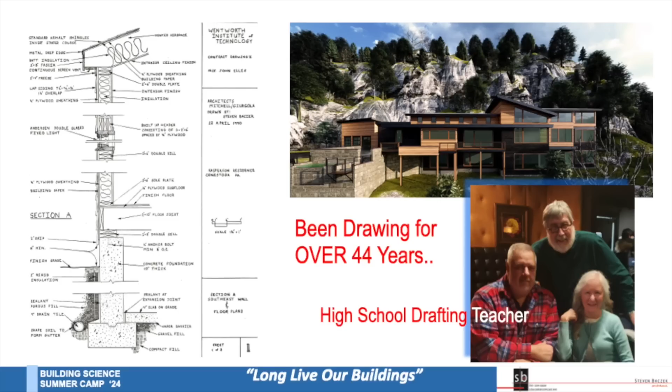And for those of you that don't know, it is actually considered a language. I had a friend that went for a master's degree and they were able to use architecture in their college application as a second language because it's a graphic language. So, I've been doing this a long time, 44 years. The drawing to the left, I actually dug it out. It's the first wall section I ever drew in college, 1980. Come a long way, because the rendering of the house on the right is the stuff I get to play with on days like this.

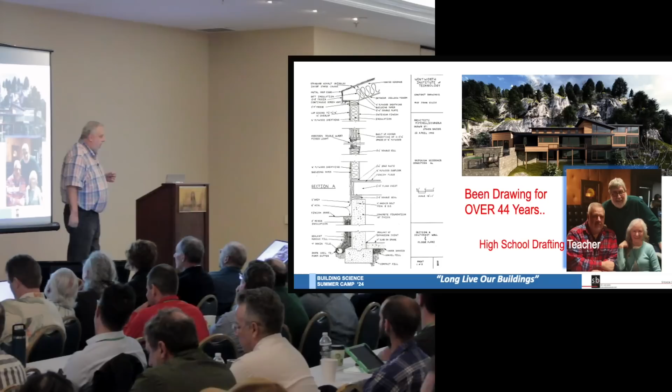Our firm, we work all over the country. We have projects in a lot of states from Colorado to South Dakota to Louisiana. Been doing it a long time, and I'm somewhat of a loyalist in the sense that the gentleman in the bottom right photo was my drafting teacher. And we usually get together a couple times a year and have dinner to just catch up and talk about where life has taken both of us.

Onward. Drawing. In developing this, I actually learned a lot about what I do when I set up a set of drawings. A lot of things we just take for granted in our work until you're asked to explain exactly what you do. So one of the things I was doing, I'm sitting there going, I wonder how many lines are in a typical drawing set. So I opened up 3 random sets,

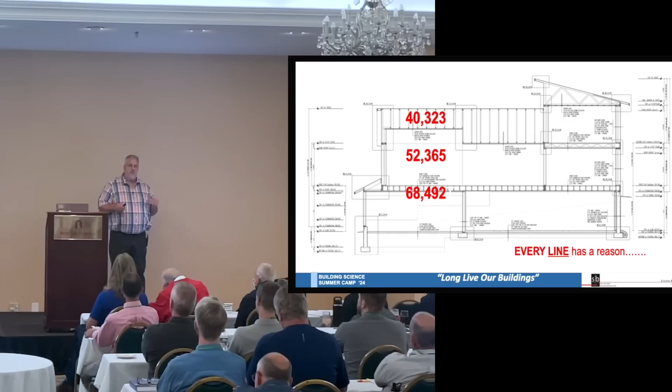listed it. What you're seeing there, between 40 and 70,000, is how many lines are in a typical drawing set. So when you're flipping through those sheets, that's what we're talking about, somewhere 50, 60,000 lines. And the reality is every one of those lines means something or should mean something, right? So we have a really important job in what we do. Although I have seen some sets where some lines probably didn't mean as much as they should have. But anyways, that's what we should strive for.

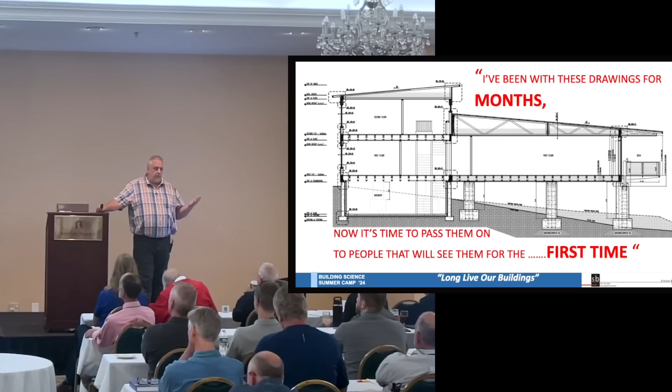Another thing I always have to remind myself of: we might design a project for over a year, do CDs, get into it, and then we pass off the drawings to the general contractor and subs and code officials, and that's the first time they ever see those drawings, right? So it's really important. For me, it's easy to say, well, I know this is that, and that's on sheet A21. But for someone to first see those drawings, there's a huge communication gap there until they get familiar with them.

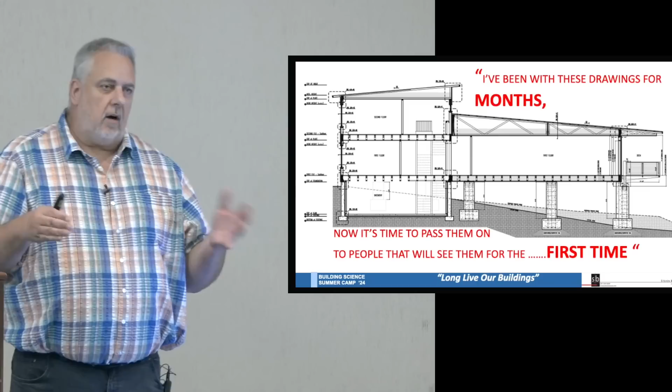And some of them only need to get familiar to throw a bid or a number at it, et cetera. But it's really important that our set of drawings is compiled in such a way that if you're giving them to somebody that's not familiar with the project, can they comprehend it? Can they get behind it? So just some thoughts. This is a detail, not my detail.

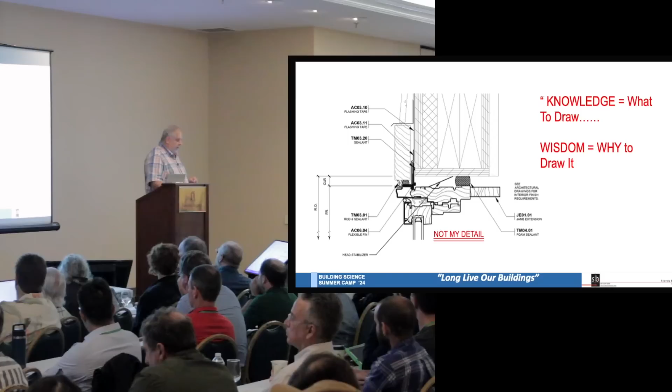I should have made it larger, but I didn't want to make a big thing out of it. I just grabbed it off the internet. It's one of those things, knowledge and wisdom, knowing what to draw versus why to draw it. There's a lot of architecture sets that I see get put together, and it's kind of like, let me see how many sheets I can fill up. Let me see how much random information I can pack in there for the builder to have to sift through to actually get the 2 or 3 tidbits of information that they need,

as well as drawing the right thing. So when you look at that detail, notice there's a sealant bead under the head casing. Behind that sealant bead is a whole series of flashing. So from a building science perspective, we put in all this flashing to maneuver water only to dam it up with that sealant bead. So it's really not a detail that's functional or that would work, right? Knowledge is saying, we should put something in here to keep the water out, while wisdom, and this does come from Joe, is asking the question, what am I sealing in?

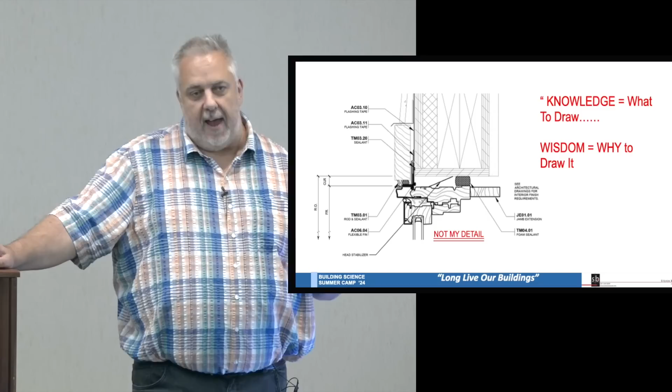Buildings don't fail because you kept the water out. That's a successful building. Buildings fail because you kept the water in, most of the time. So we have to ask the right questions when we're putting this stuff together. These I just threw in, some random alternatives.

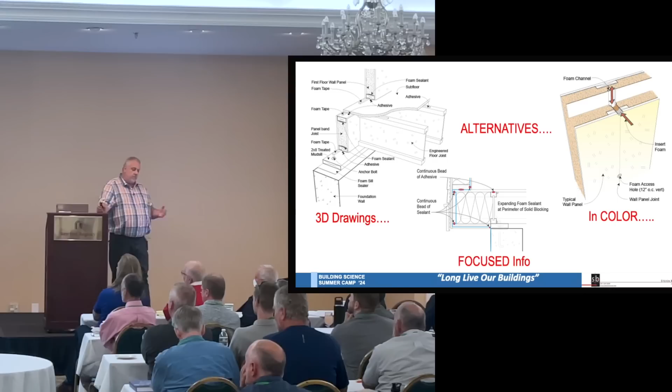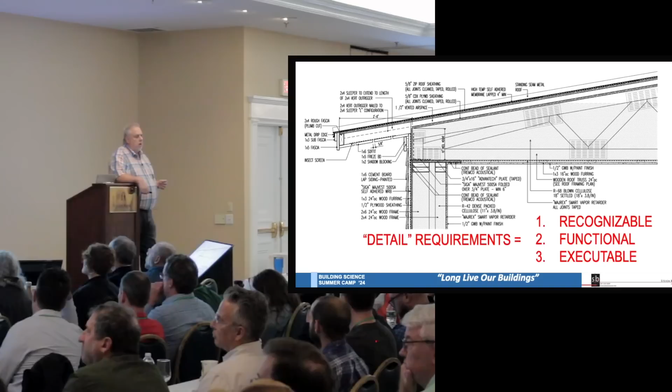As I develop details, one of the feedback I get from the builders I work with is they like that the details I draw are recognizable, right? What does that mean, recognizable? It means I'm not asking them to go buy some out of this world material and tape it with specialized tape that is extremely expensive. It's doing the right thing with the things we already do. Most of the details we develop use the same tools, the same techniques. We're just asking for a more conscious effort in certain ways that we do things.

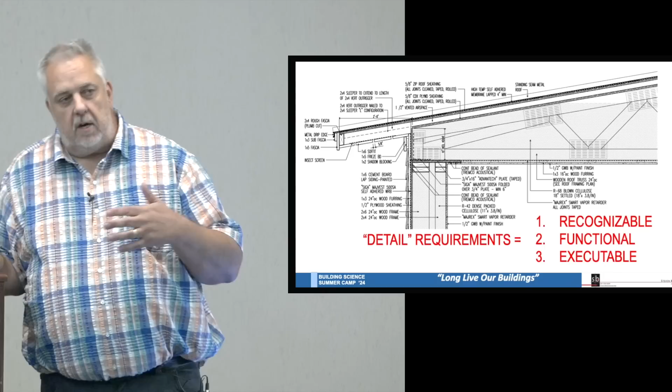So when I'm developing details on a computer, the 3 things that are important to me: recognizable, which we touched on; functional, it has to work, right? We don't want to put a bead of sealant downstream of a whole bunch of flashing. And it has to be executable, right? We all hear the stories of builders, oh yeah, those drawings just went in the circular file, because they really didn't send a message of, you can build this. One of the things I pride myself on is when the set of drawings leaves the office, there's at least one way that house can get built.

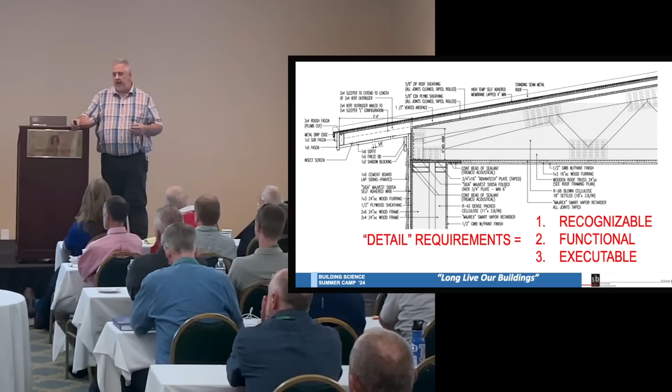Now, the framer might come back and say, hey, I like that detail, I appreciate it, but if we did this and this up on the roof, I think it would work a little better, and I'm more familiar with that. That's fine. But the drawings don't go out unless there's at least one road to success. They never go out and say, well, we can just figure that out in the field. No, that doesn't work. And it certainly doesn't work well.

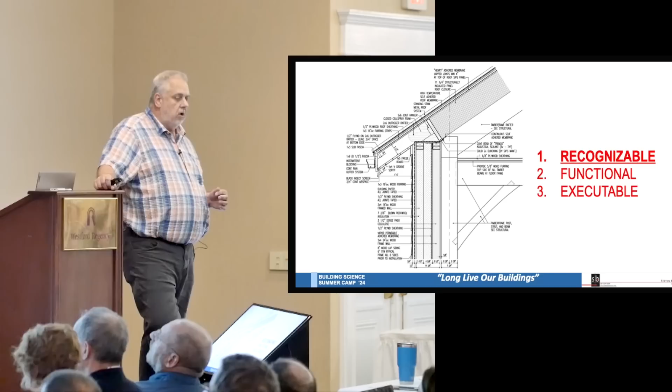So, recognizable. At first glance, it's a relatively complex detail, but it really isn't. It's a double wall assembly outside a timber frame for a passive house structure, and it's got a SIPs roof. Everything there, most builders have touched or used in a typical house. We're just putting it together in a different fashion, maybe a little more complex fashion, but it's recognizable, right?

There's nothing about that detail that says, hey, you have to go get this special tool or you're gonna need 3 guys to do that. It's stuff that they recognize that we can do. And that's part of that execution, right? If I give them something they understand, then it's something that aids in that execution.

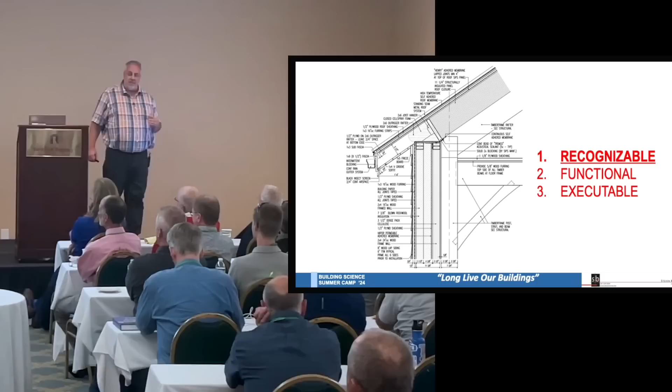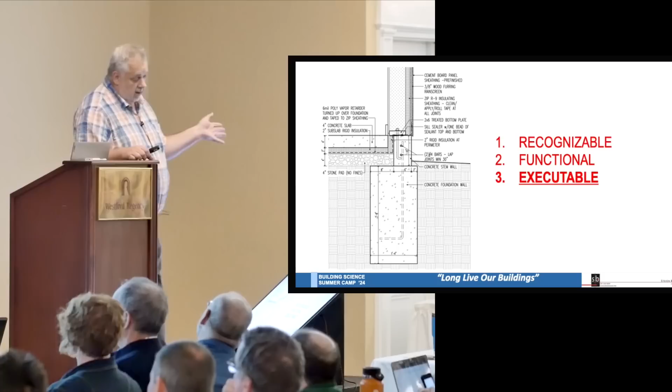Executable. I do a lot of work with Jake Bruton down in Missouri. This is a detail that we developed, right? We wanted to do a slab that is a finished slab, but we wanted to be able to insulate it. And it always becomes somewhat of a hassle trying to get the insulation in there and get the wall at the right place. So we came up with this 3-step method where we dug the trench, which is highly financially efficient there. They just use a 16-inch bucket, they trace around the foundation line, they are allowed to ground form their concrete. So we did that, but notice the little curb.

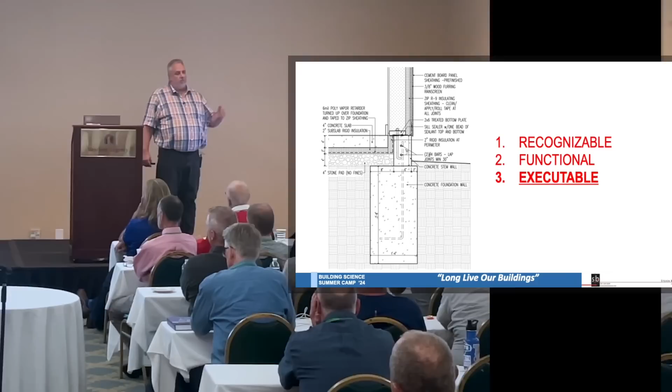We put some rebar and then we pour the curb, but the curb is set in 2 inches. Why is it set in 2 inches? So that the concrete guy has a place to put the formwork. He sets it down on that lower piece of concrete and then basically pours the curb up against it, and then we do the slab and it's business as usual. But it makes that detail far more executable with that simple fact of moving that curb in 2 inches and making people's life easy.

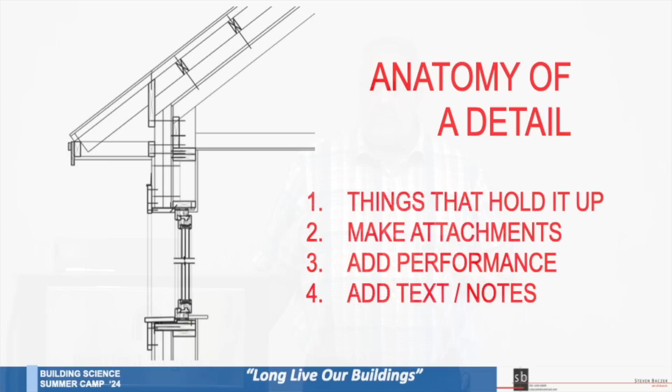Let's talk about details in general and how I develop them. Well, first and foremost, we have to think about the things that hold it up, right? Obviously, we don't want our buildings falling down. So that's pretty easy. Develop the detail, put in the structure, how things are going to meet, and then how to make attachments. I chose this detail. I'm actually in the process of developing this one, so this is kind of like almost live streaming this detail.

But we have 4 inches of rigid insulation on the outside of the wall, 6 inches on the roof. And how do we attach that? And better yet, attaching it is pretty easy. How do we attach all the trim around the windows and all of the associated pieces that come together with that? And do I have a place to nail that jamb trim or that head casing? All of these things make it executable, right? We have to think through these things.

So before I even get into putting in tape and flashing and all of that, I want to make sure that all of my attachment requirements have been serviced here. And then I'll add the performance, basically putting in that insulation and the hatch and all of that. And then we'll simply add the text. You know, the other thing I find pretty common in construction drawings is you always get the real simple wall section or the real simple building section. Nobody draws the hard one, but the hard one is the one we need.

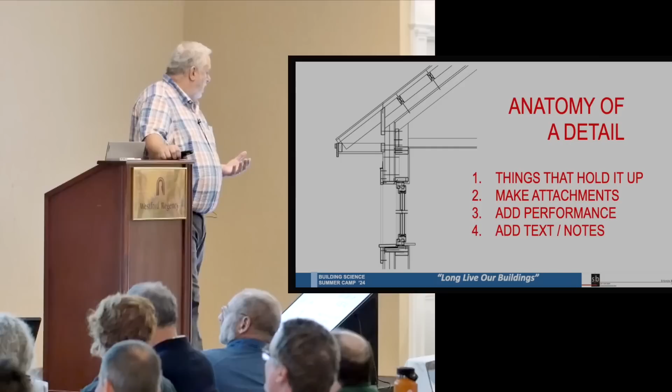The easy one isn't the one we need. The builder probably knows how to do that in his sleep. But when this roof is coming in and has to miss this window, and then the insulation and the air barrier is in conflict there, somebody has to sort that out and figure it out. And that's what we have to do. And we have to pick those hard details, not necessarily those easy ones.

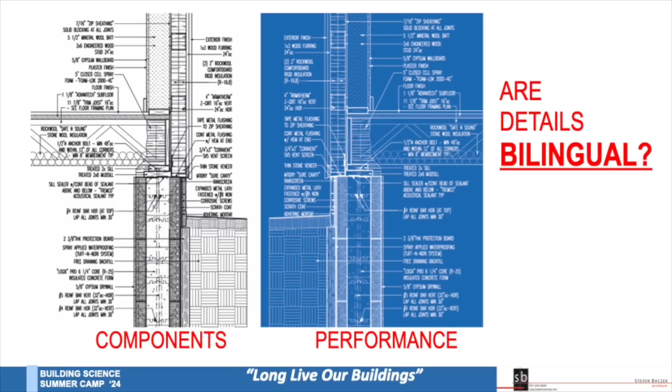So, details themselves. You know, when I was developing this, I was thinking about it, and it's like, in all actuality, details are bilingual, right? We always think, hey, okay, there's a 2x6, that's an LVL, et cetera, but the people in this room tend to think of it a little differently. Like, where does the water go? How does this detail handle air management?

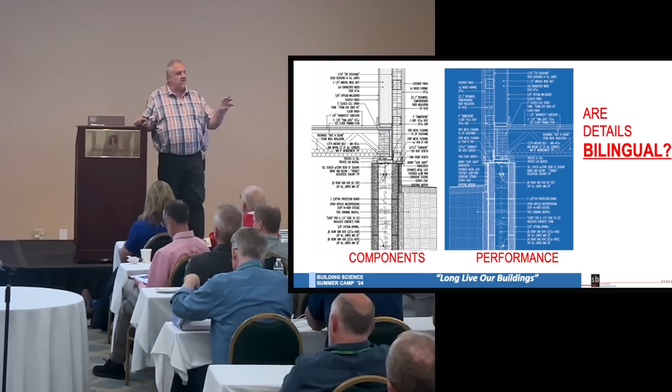How does this detail dry out? How is this detail insulated? What's the thermal management that's happening in here? So details aren't only about how do we put it together, it's also about what is that system doing with the other assemblies to make it a successful house.

A lot of times I do what we call our twins. So on a computer, it's real easy. I can do a detail, I can add all kinds of information, I can put it on separate layers, and I can freeze layers when we go to plot it. So you can see layers 1 through 7 and 12 and 13. And then on a different detail, we can show layers 7, 8, and 9. And what that does is it allows me to sift and sort out information for clarity.

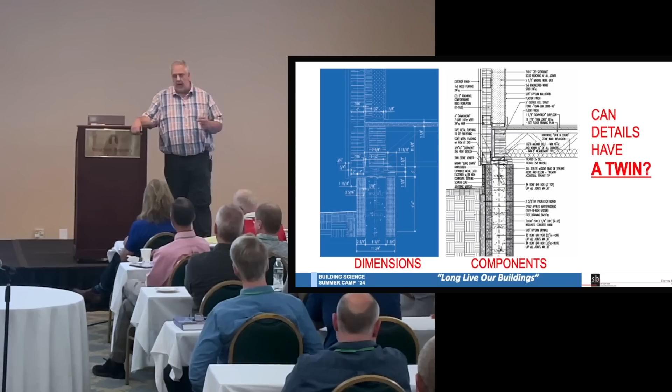Working all over the country, I obviously don't get to work with the same builders all the time. And in some places in America, with the subcontractors, there's communication issues of trying to talk to them, or maybe just talking to one person on that crew who disperses all the information. But trying to find a way in which the drawings can kind of service everybody and sort out the information that that person needs at that particular time in the project, right?

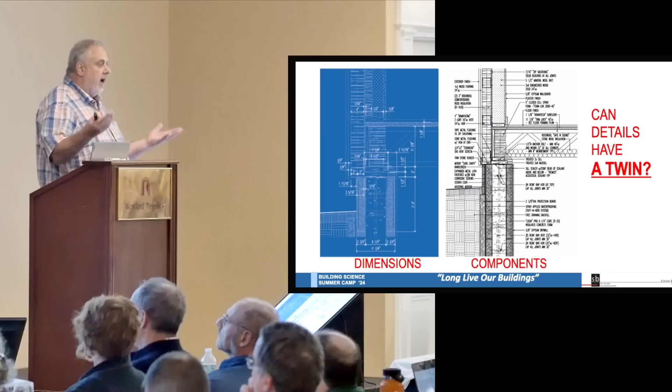So this one here, we get all the notes in one detail, we get all the dimensions on the other side. So if the builder said, oh, I wonder what this is or what's this supposed to be here, he's not guessing, he doesn't have to call me, he's got a full drawing there with every applicable dimension to that detail. And so he can check himself and find out, okay, are we in alignment or not? And sometimes I do the twins, again, for the purpose of, we have different people doing different things.

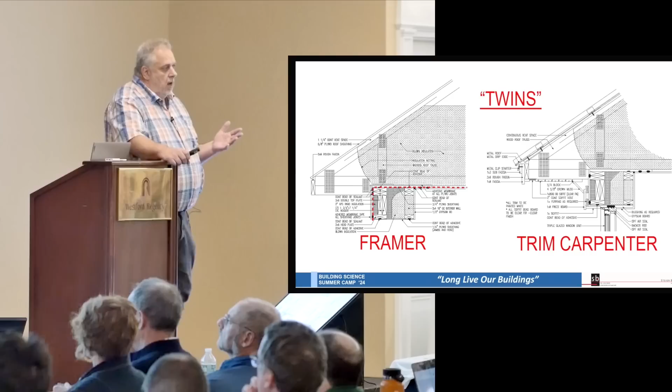Probably late 80s, I actually worked as a carpenter. Well, the guy that I worked for, they did the foundation. He did the framing, put the windows in, did the siding, did the roofing, and then put all the insulation in. Then the drywaller came in, and then he trimmed it out, hung the doors, put the cabinets in, put the hardwood floor down, right? Everything that I just said was one contractor.

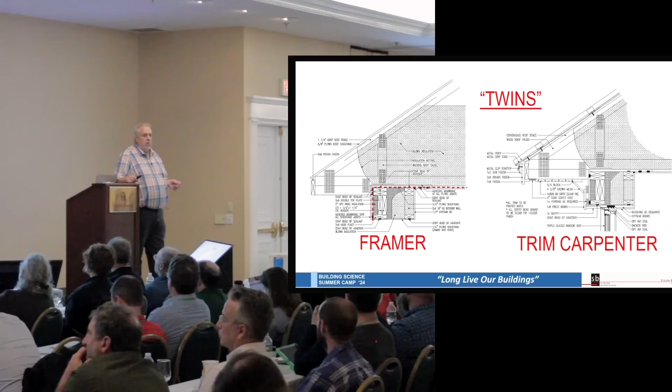If you did that today, we probably have 3 or 4 contractors that deal with the window, right? There's the guy that puts it in, then the guy that comes around and seals it and tapes it, and then the trim guy that comes around and puts the trim on. Totally different unions. Right? So how do we satisfy that? And how do we make sure that we're making their job as easy as possible, right?

Without trying to make my job harder. I mean, I'm not sitting here saying, hey, let's double the price on doing these drawings. That's not my point. But trying to get this out so that we have as little conflict in that communication stream as we can.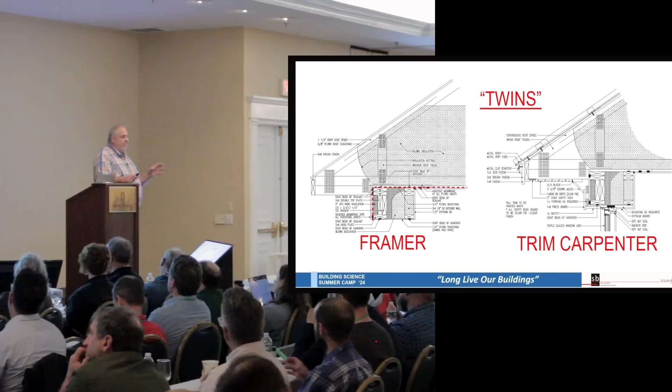Right? So again, twins, the detail on the left, that's for the framer. It's everything the framer needs to know. It's all of the framing components. It's where all the beads of sealant and everything that he has to do is on that detail. The detail on the right, while it still shows all of the beads of sealant, it only has the notes for the trim carpenter. It's how do I put the soffit in, the fascia, all of that. So we're able to separate that information so basically each of the subs get their own version of that detail rather than having to sort it out.

So, like being here talking to you today, fear is a really good motivator. Got this project on the coast north of Boston, drove away going, yeah, brand new, beautiful, big house right on the rocky cliff overlooking the ocean. 10 minutes later, holy crap. Big house, very rich client, house on the ocean, on a rocky cliff.

Maybe it's, you know, careful what you wish for, right? Those cliches, they do mean something. But anyways, so we're doing this. Rocky cliff, we do a bunch of blasting, bunch of grinding.

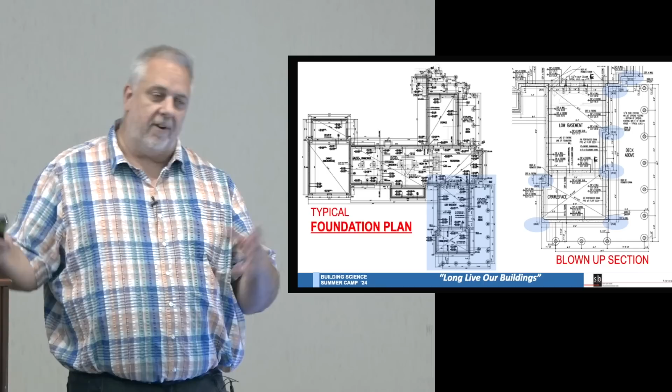That was where the old house was. So there was no maneuvering for "that's kind of close." No, it had to be. And so that really started to instill some fear. So the blow up on the right, you can see, that's that colored section in the lower right of the plan. The places where I highlighted, notice I mark up steps in wall, steps in footings. It even has the finished grade at every corner of the building in parentheses.

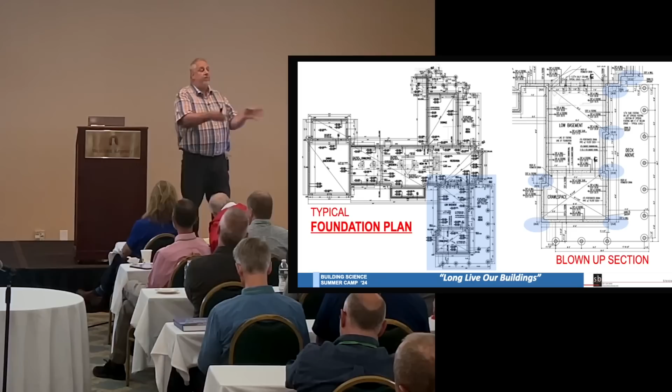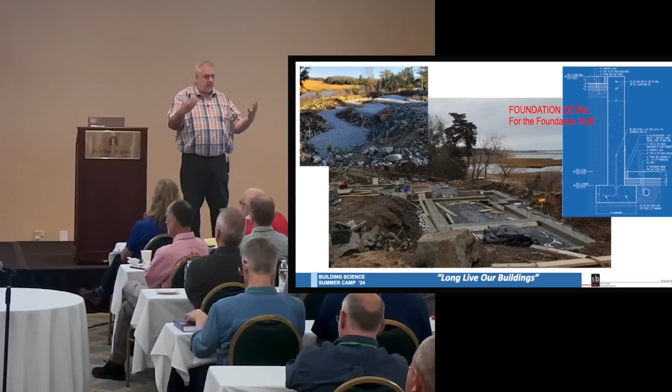As a side note, I always separate a lot of drawings. I'll pull the foundation wall out and put it on the foundation print. I'll pull it out of the wall sections. That way there, two things are happening. And I learned this from conversations with builders. They don't want to have to send 5 or 6 drawings to their concrete guy. They want to send 2.

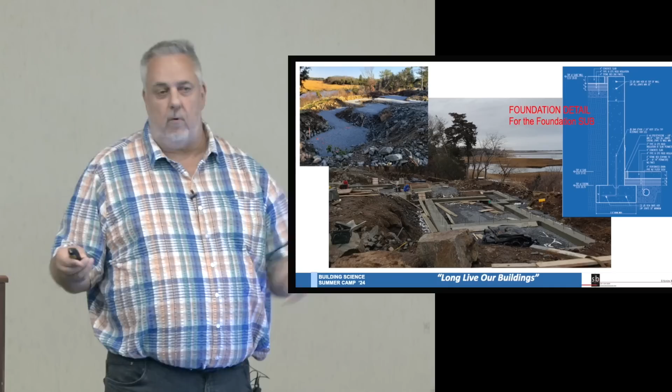So if I put a section of the foundation wall on the foundation drawings, they can just send that one drawing off, and now the foundation guy has everything he needs to know on one sheet, right? And you're not taking a bunch of sheets, and he's not sifting through wall sections, siding and all of this other stuff that really doesn't pertain to him. He's long gone before the lumber gets dropped, right? So what did I do?

I built the 3D model of the whole foundation. It added a few hours, but this isn't a cheap house. And to fix that problem is not a cheap fix, right? So a couple hours, maybe we're talking 6, 7 hours to get it perfectly right, was certainly worth it. Notice in the model, you can barely see it, but there's some green fading. So I was able to delineate between above grade and below grade.

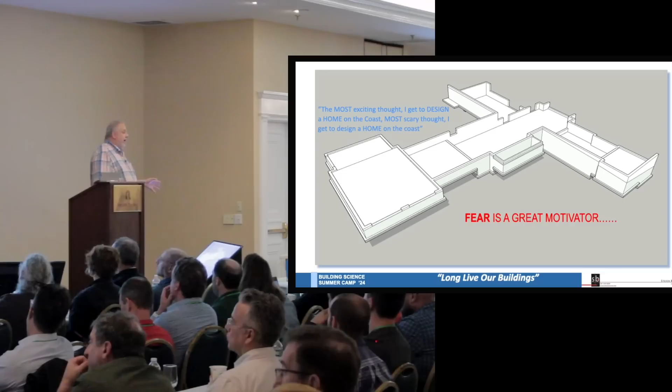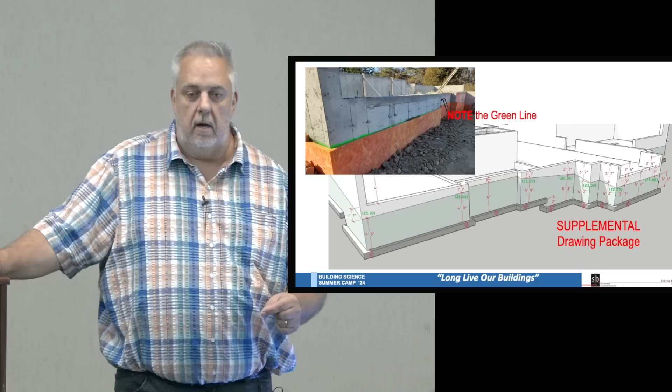So in doing that, I solved the problem for, okay, I understand what I'm doing now. I see it here in 3D. How do I get this to the builder? So I take that drawing, I add a bunch of dimensions, and here you can clearly see all of the numbers in green tied directly to the site plan. So now the builder knows exactly where the insulation goes.

So what does Brian do, who's the project manager here? Well, he takes my numbers, goes around the foundation, snaps a bunch of lines, sprays that green line in the photo, and then simply tells the gentleman coming to do the Tuff-N-Dri, just take it up to the green line.

So I'm out of hot water, the general contractor's out of hot water, the Tuff-N-Dri guy is out of hot water, and the excavator is out of hot water, because the excavator now just buries the Tuff-N-Dri. So that one drawing coordinated a whole bunch of efforts, but not only coordinated, but lowered our risk to almost 0 for 6 hours worth of work.

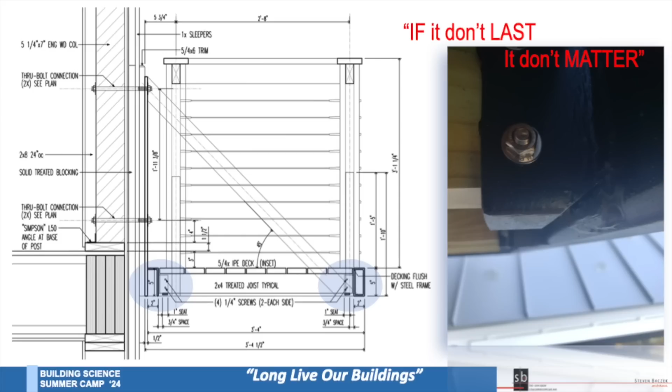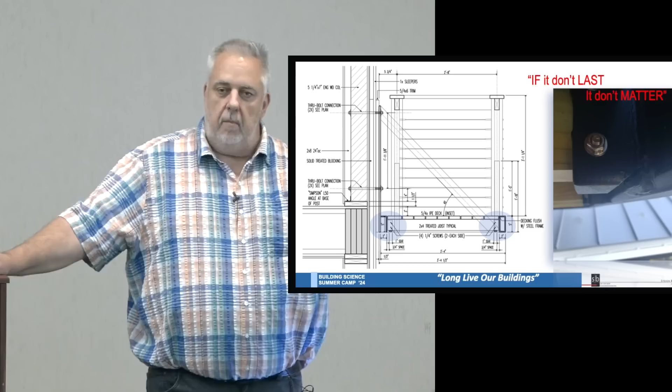One of the other things that we do, especially with local projects, the projects away from here, they become a little bit of a challenge. But locally, I have a structural engineer. He doesn't do any of the drawings. We draw every structural drawing, details, sections, framing plans. I send them to him, he marks them up, I put the marks in, I send them back, he signs off on it, I stamp them, we build the house.

Now, you might sit there and say, well, Steve, that's a lot of work. It is, it's a fair amount of work, but he doesn't charge much. He'll do a $4 million house for a $2,500 structural fee, right, to review the drawings, because I'm doing all the drawings.

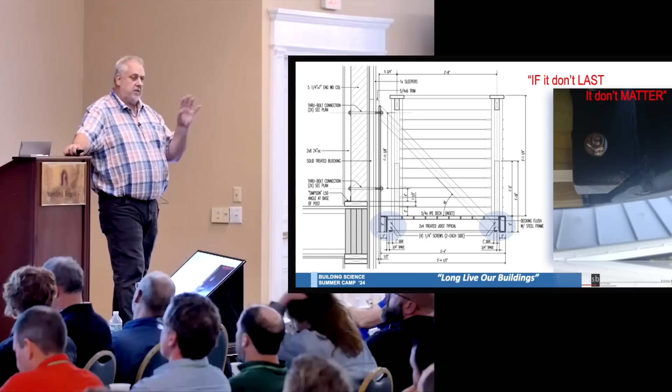But the beauty is, by me doing the structural drawings, I don't know many structural engineers that go beyond strength or holding up the building in the detail, right? Not many structural engineers, and it's not a dig on them, it's just they're not trained to see that way, right? So by me doing all of the details, then I can sit there and say, where does the water go? What happens to the water?

So this is a very small detail on the house, but we did these joist hangers that were welded to that 3x5 on this deck. And then I called out for the backside of the joist hanger to be notched so water could drain out. So that floor joist doesn't sit in a puddle of water on that joist. We know where the water goes.

And the floor joist sits on a little 1/4-inch piece of neoprene. So it never sits in water. A joist will never rot out. It has the ability to dry. Water has the ability to drain. We get a detail that holds the deck up, but it's highly durable now because I take the responsibility to coordinate the structural engineer's efforts with our building science efforts in that detail.

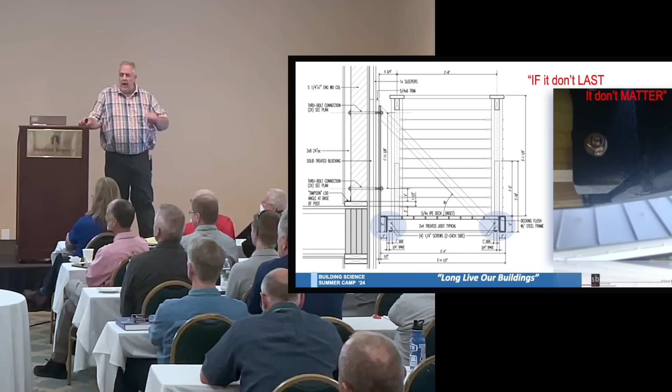Same here. If you follow me on social media, I'm sure you've seen this project. I put no less than 1,000 photos or videos up of it. You know, we were developing this project, Jake and I, he was the builder on this, and I said, it'd be really cool to do a 10-foot cantilever deck out here. It's probably a little over 9 foot, but send it to the structural engineer. He goes, yeah, we can do that pretty much no problem. I was like, yes, that's awesome.

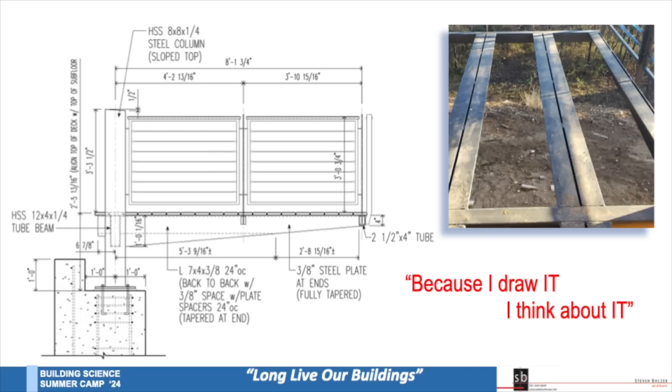But the structural engineer comes back and he has these two 7-inch angles and he's got them welded together. And there's a little notch at the top. And I said, okay, from a durability perspective, where does the water go? Water's gonna sit on the top of those angles, it's gonna rust out eventually, and this deck is gonna fail. So I went back to the structural engineer and said, can we split the angles?

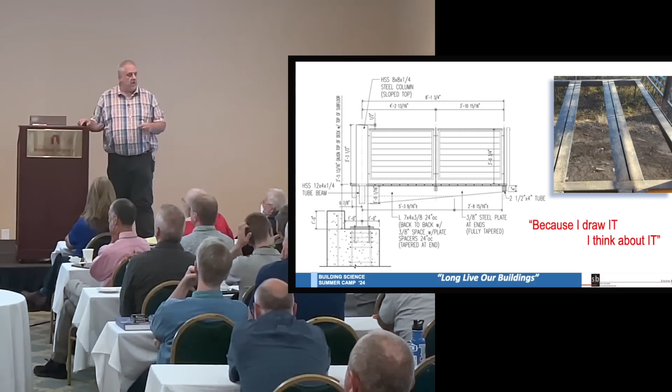And you'll see it in between the angles. We welded a little 3/8-inch steel plate like every 2 feet along those angles. So now water can freely drop down in between those angles. Water management issue gone. We have a draining system that can get rid of the water. We've answered that question, where does the water go?

And then these are just some other details for the steel guy, giving you a picture of it. Even the steel post on there, we put a little slope. It's an 8x8, and I called for a little 5% slope on the top, so that we're always stitching together building science with all of our work and asking the very simple questions.

I always find it interesting, you know, I'll sit in on a Thursday, or I won't say Thursday, I didn't mean a BS and beer reference, but I'll sit in on these online seminars and man, architects love to complicate shit. They'll put tons of insulation in and say, where does the water go? Oh, it's gonna get stuck in there. Oh, no problem. We'll just drill through the insulation and provide a drainage path.

$4 million house, and your answer is, we'll drill a hole up through the insulation where we're over insulating the window frame? Doesn't sound like a detail that would go appropriately with that house. But man, we love to complicate things. Building science is pretty simple.

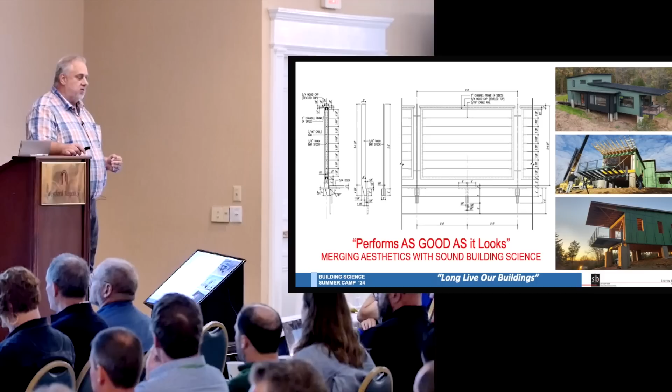I use Joe's remark, and I know I reference him a lot, but pretty much Joe is a lot of the reason I'm standing here in front of you, right? It's not rocket science, it's building science. I tell people that all the time. You ask 10 simple questions and you lower your risk by half if you can answer them successfully in doing a set of drawings. It is that simple. It doesn't have to be complicated.

Roof framing plan. A lot of times we draw things not because we are actually designing them. I'm drawing them to show somebody the intent, right? We do a roof framing plan. The roof framing plan goes to the general contractor who sends it to his truss manufacturer. If I don't do the truss elevations, guess what? I'm almost guaranteed to get back a truss package that is nothing like what I intended, right?

The heel height is wrong. The slope of the roof might be wrong. If it's a hybrid truss that has a small portion of scissor truss embedded into a gable truss, the dimensions are going to be wrong.

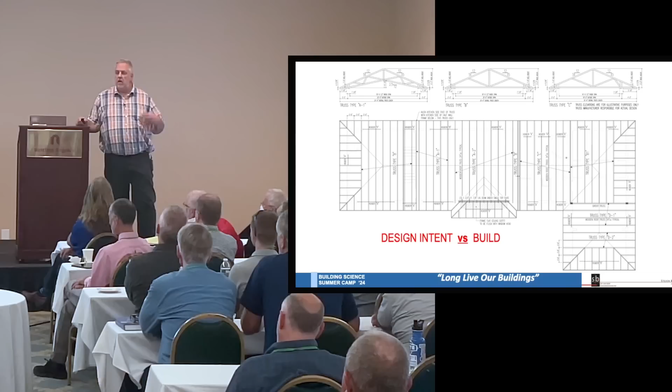So I learned early on, if I simply draw a couple truss profiles and then I outline where they're located on the roof plan, now it's a drafting exercise for the truss manufacturer. They don't have to think. All the dimensions are answered there. They can plug it in, they can send the drawings back, and we save a lot of time, right?

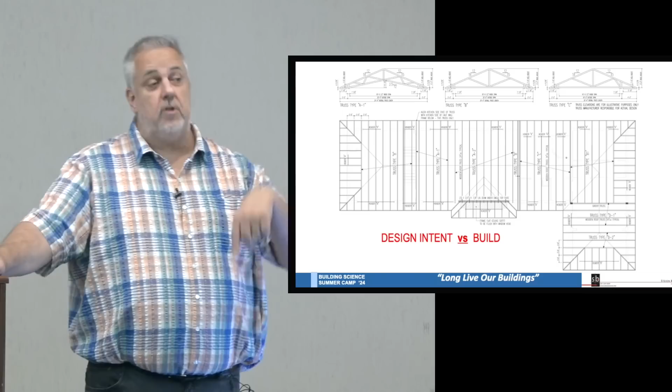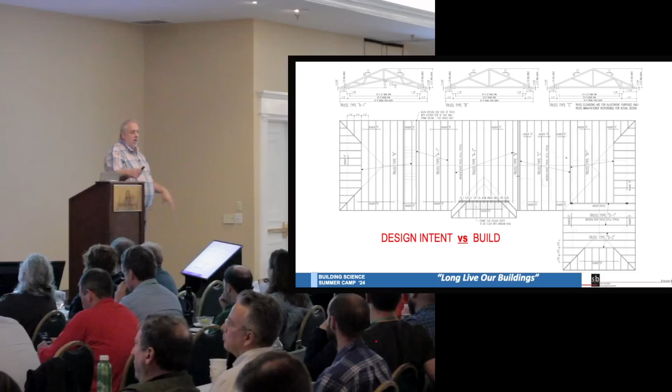It costs me a little bit of time to do it, but we save that time in not having to go back and forth 3 or 4 times and then have the truss still come out wrong. Now, some of you might laugh, but it happens, right? 3 or 4 iterations, they build them and they come out and we're cutting them up and modifying them on the site.

Some focused information that goes on drawings. We do a lot of work on the water, near the coast. In this particular project here, I think this was Zip R6 or maybe it was R9. In this particular case, this was Zip R9. The structural engineer had a long list of, hey, we need to figure out a way where we can show them where the shear walls are, where connectors are, and then here's all the hardware that goes in the wall section. So we developed drawings that showed those answers.

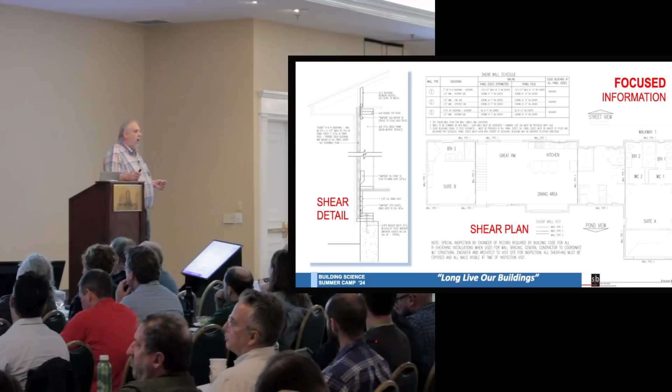There's no other dimensions on those floor plans, nothing. It's just, this is where the shear walls are. You have a shear wall schedule there. We know how they're built, what nail goes in, what the spacing is on that nail. In the wall section on the left, we have the details. We have all of the Simpson hangers called out, where their location is, what their spacing is on that wall. Again, making everybody's job that much easier to be successful with.

Windows. This is a big talk because windows are a tough one. We do a lot of Euro flangeless windows. Occasionally we do some flanged windows and we're working up some standard details for that, but I use the flangeless for this example. In my time, I've probably done about 9 generations of window details because I like to go out, I always install the first or second window with the builder.

And I tell them, I don't do it because I'm coming out here and this is some kind of lecture like, hey, Jimmy and Johnny, pay attention because I'm going to show you how to do a window. No, we go through how I typically install it, ask them, do you have any conversation here, any discussion you want to talk about? Do you want to change something? And occasionally they say, hey, maybe if you did this or can I do that? And then it becomes the next generation of the detail.

But one of the problems with these details is you have the sill, jamb, and head, very traditional details, pretty highly detailed, all the dimensions are there, but again, it's a whole bunch of information that different parties only need small tidbits of, right? I could calculate the rough opening for the windows on here, but it'd be a hell of a challenge.

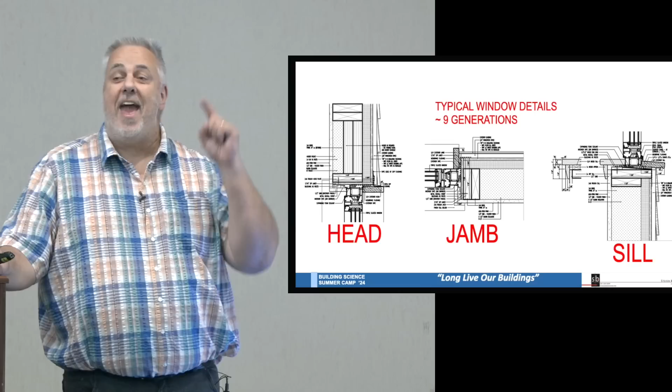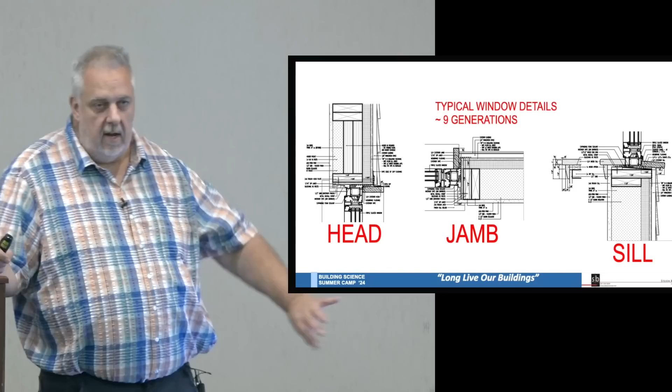And yes, we've had a house where we went out there and the builder framed every window opening 1.5 inches short in width. In height, it would have been easy, but think about it in width. Every header has to come out and get recut. You talk about a pain in the ass. And especially when it's 1.5 inches, does that mean it's off center? Do we have to recenter it? So, needless to say, the days of 3 details for windows, long gone.

Now, we get a whole series of details. We're just going to run through how that one sill detail became 9 details. All right? So detail 1, that's everything that has to happen to the rough opening. We put a back dam in, we put a slope sill in, we put a piece of flashing. That's where our window is going to go with the applicable dimensions. That's it. That's everything that the rough framer needs to know to install that window.

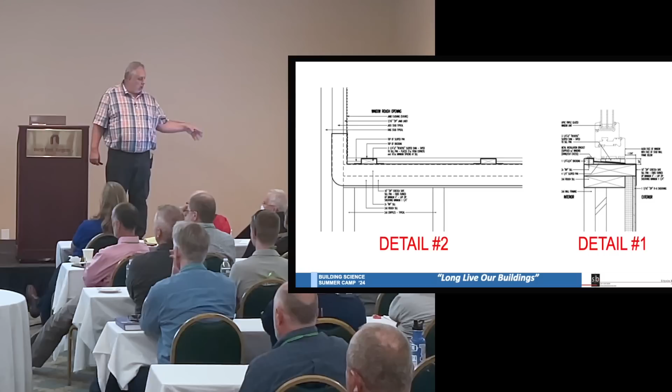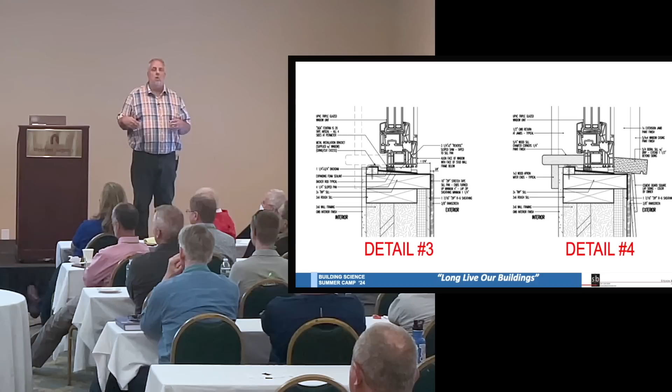And by the way, I did a front elevation to show you where some shims will go and where the flashing goes on that detail. So that's 2. Detail 3, we install the window. We do our air sealing detail there, end of detail. Detail 4, trim carpenters come in, siding contractors come in, siding gets attached, trim, all of that stuff gets applied to the window, and then we move on. 4 details. But it doesn't stop there.

So now I don't get any more calls about, hey Steve, the rough opening, I just want to run those numbers by you. No, go to sheet 21, it's there. Unit dimension plus 2 inches wide, unit dimension plus 3.5 vertically. It's all there, no questions asked.

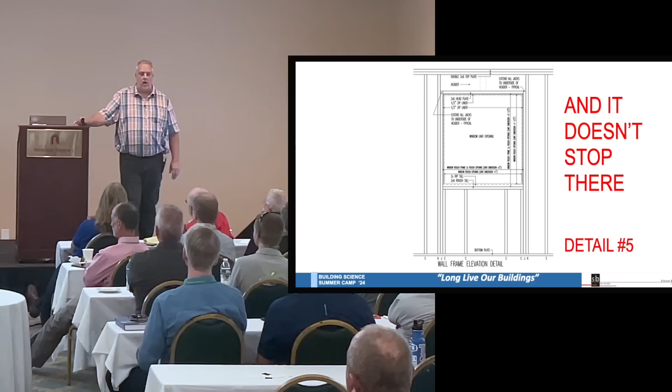It still doesn't stop there. I did it in section and plan. So we have the dimensions everywhere. Everything's labeled appropriately. The exterior sheathing is there. We'll have them for different details. But again, providing that level of clarity so that we can do something.

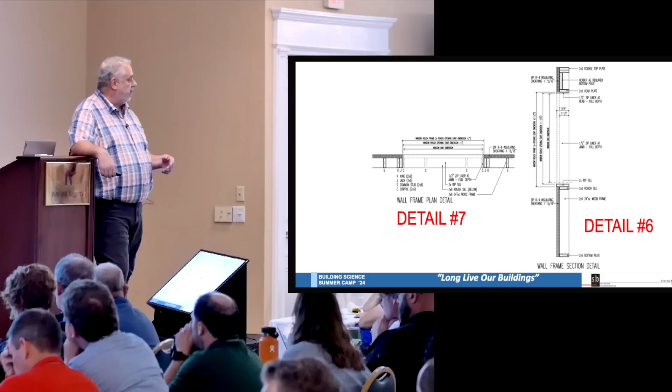We saw, I forget, is it Brian from RDH yesterday, right? Windows. It's one of the most susceptible areas in a building. But yet, how many drawing sets have we seen that actually have executable window details on them? Right? I mean, if I was an insurance company and an architecture firm came to me, I would be like, yeah, we'll give you insurance, but you've got to show me you can draw a window detail before we give you that insurance policy, right?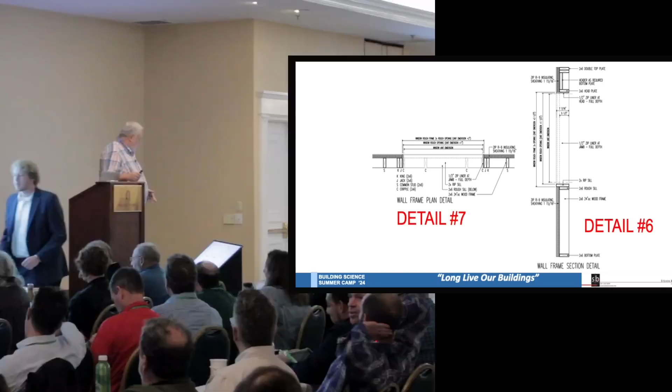But, I mean, we in this room laugh and joke because it is kind of funny. But the reality is, Peter Yost and I jump fences and go and look at these houses when we're traveling. It's horrendous. And we're not talking about some little 1,200-foot cottage. We're talking about a $6 million building somewhere in Texas. So, I'm serious. It's like, how many people really?

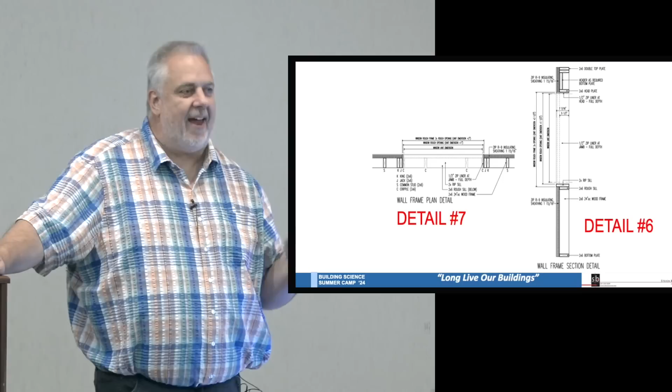And I'll tell a little short story here. I had a couple guys, consultants, you'll appreciate this, they were the best Monday morning quarterbacks that I've ever met. So I got them one day. I said, you know what? We're going to install windows out at the Johnsons. Why don't you come on out and we can talk? So we got out there. Framer's getting things ready. I said, no, let's let these two guys install the window.

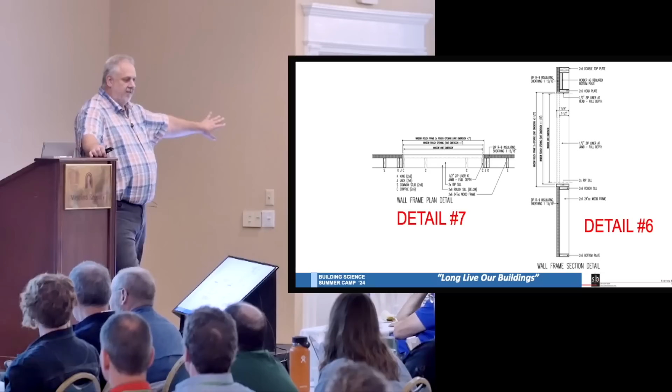And they looked at me and said, you want us to install the windows? I said, yeah, all the tools are right there, drawing details right there. You're always telling me about how I should do this and draw this. What a great opportunity for me to learn from such experts. We stood there for about an hour and a half before we said, guys, forget it, just go. And we installed the window. But it's a lot easier to talk about this stuff and create an academic exercise about this stuff than it is to do it.

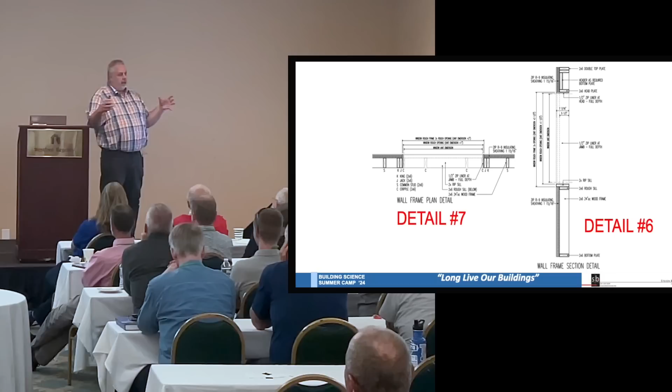And unfortunately for me, I'm in the position where I have to do it, right? I have to provide details that someone's going to use next week and we're going to be installing windows. It's not a, hey, let's put that up and we'll talk about it, have a conversation. No, we have to do it, we have to do it right, and we have to make sure everybody is on board with it. So we're through 7, but it doesn't stop there.

I get a lot of questions about, hey, where do the brackets go on holding the windows? So I did a drawing outlining the brackets, showing where they go, how close they can go into the corner, but not in the corner, 16 inches on center. And then the last detail is a simple detail to say, hey, here's how you flash a window.

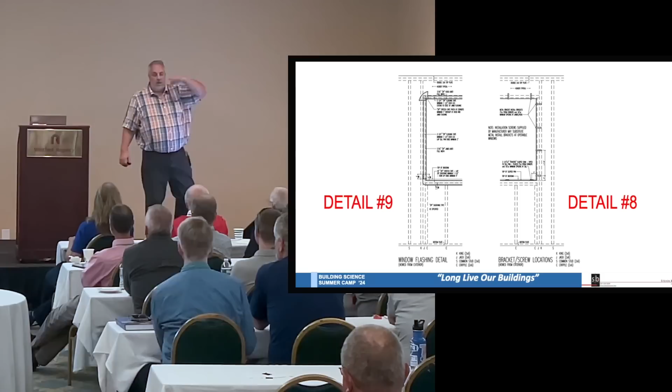Now again, we can sit here and chuckle, but when we're in Colorado and the owner of the framing crew tells guy number 1 that we're going to install windows today, and guy number 1 tells guy number 2, hey, get guys 3 and 4 to get the windows out of the garage and get those installed, by the time it gets to them, we're making pumpkin pie or something in the back of the house, right? We're not installing windows anymore. So we have to make sure that you just hand them this stuff and say, this is how you flash a window. This is how you properly lap that flashing. This is the dimension I expect that sill flashing to go up the wall.

Part of what we do as architects is we come up with ideas. Is Katrina in here? I don't see her, but anyway, she'll be happy to know. This is a passive house that we just recently did. Slab on grade, and of course, the HVAC guy, he's crying and moaning. I need space, where am I gonna put all this?

All right, so I tell you what, I got an idea. We'll create a manufactured attic, and we'll throw it up. We'll have the truss guy do it, and we'll put it up there. So I developed the idea, drew up the section. But it's not good enough to just stop there. Because, yeah, okay, I illustrate the idea. Everybody in this room can look at that and say, great, but how do we do it? We're in the business of doing it, not talking about it.

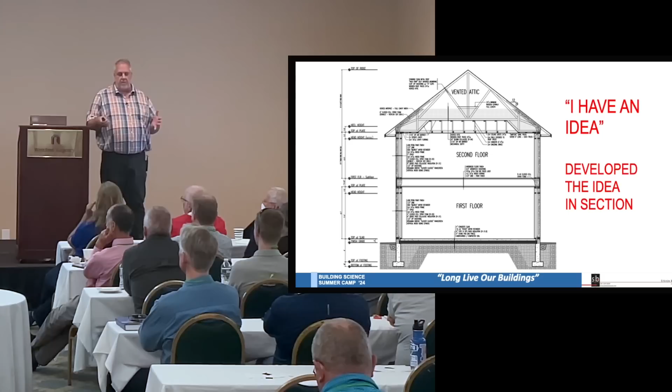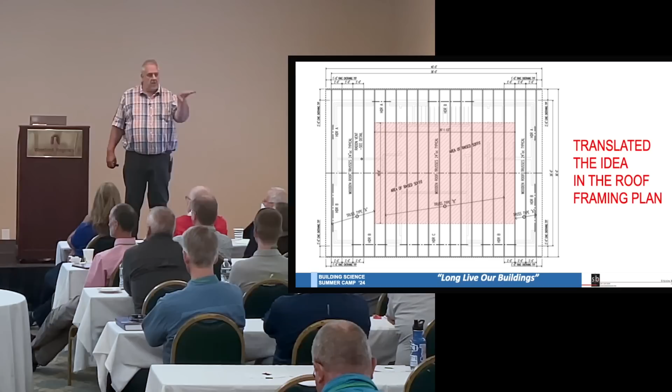So, translated that idea to the roof plan. Hey, here is that area of raised soffit. It touches every room on the second floor. So now the HVAC guy is totally satisfied. He can get ductwork and our Zehnder ports to every room on the second floor.

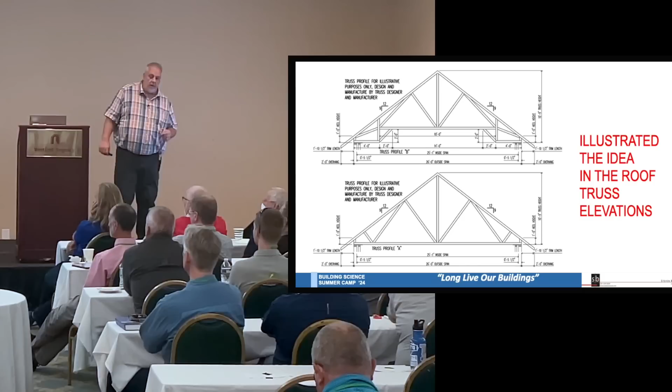We don't stop there. We show the truss manufacturer. These are the two different trusses that we're going to use on that project. And this is what I intend to do to create that manufactured attic. And these are the dimensions that we want the trusses delivered at. And then we do the final detail where we put in the performance specs and the text and everything of how exactly that roof detail comes together and how we build that manufactured attic, right?

So having an idea, we have to make sure as architects that we follow through with that idea, that we just don't whip up that one quick drawing and say, yeah, we'll figure that out. No, it needs to get figured out. And when clients say, well, why should I hire you? Well, you have many choices. The beauty of America is you got choices. You can have someone with 30 years of experience figure it out. We can send it out into the field, and guys 4 and 5 can figure out how to do it. What do you want to do? It's a pretty short conversation.

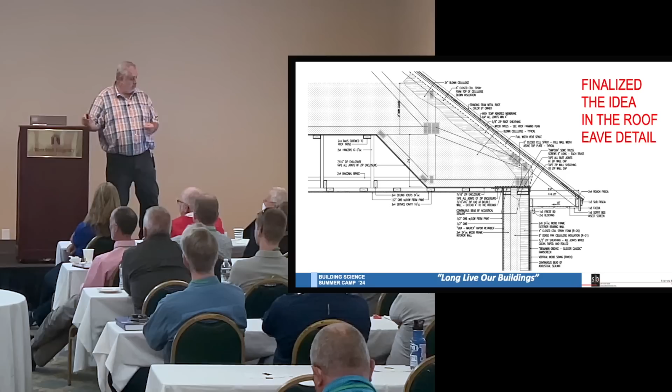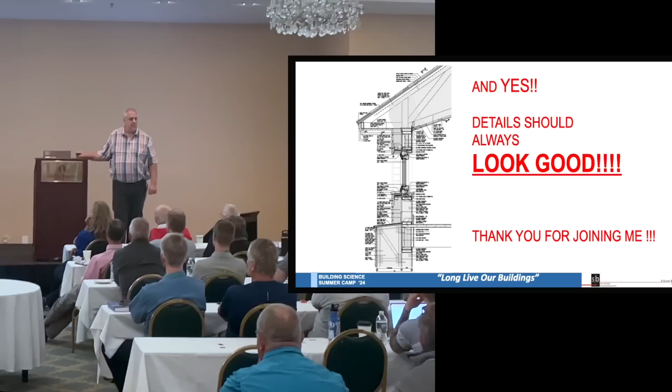Joe, you'll be happy to know the next generation of the perfect wall. I'm not leaving it up there that long because we haven't built it yet, but we will. And yes, the final comment on details. They should look good. You're putting your name out there. When they get out there and somebody opens it, they'll be like, damn, that is a set of drawings. Right? That's what you want to hear.

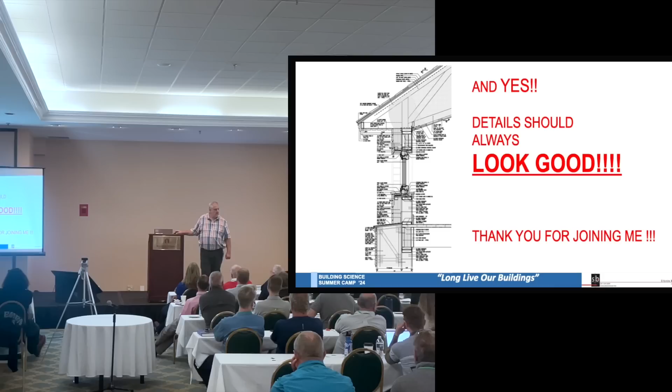Oh, you got jokes. Those are the things I was told when I got lost in the weeds with details. And having worked as a draftsman and a designer, this level of detail scared folks because they figured it created a situation where they were more liable by providing more information. And they would say, you're getting too lost in the weeds. They'll figure it out in the field. We're not here to tell them the means and methods. So this detail doesn't show means and methods. Right? It's showing performance and components.

And I've had that conversation with many builders, like, man, you got a lot of stuff here for us to sort out. You know, we just usually install the windows. Well, no, not today. Today we do it my way. What was the question? He was just saying that a lot of times people will say when you get to this level of detail, you're getting too deep in the weeds and you're actually providing more information for confusion and you're kind of working against yourself. Well, to that I say the best instruction manual is probably the best road to success. So they can say what they want. They don't want to take the time to figure it out, they're not the right builder for the job.